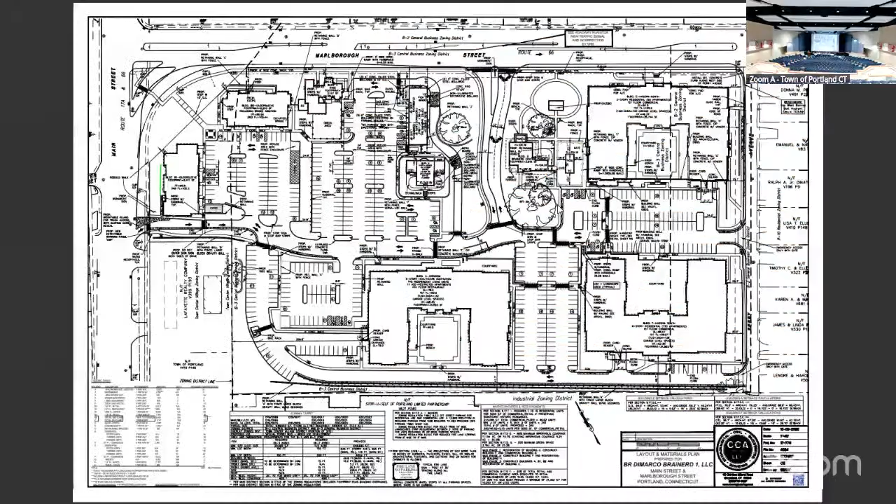If they could switch to slide 2. It's a good picture. Like something I'll draw. Oh, I think they went down too far. Oh, that might be it.

Yes, this is the landscape plan. We are proposing an enhanced tree-lined central pedestrian access, kind of at the midpoint of this curve of the new right turn to Marlborough Street. Prior, we had nothing proposed here before—we did have a connection out to Marlborough just off the corner of B2. But we felt this would be a nice feature to get into the complex through this central area. It is subject to the DOT landscape design team as far as the trees in the state right-of-way, but that's a process we'll go through with them.

The last change we're proposing: there is a sassafras tree located right here, and it's not in the best shape, not the best-looking tree in our opinion. In the prior approval, we had to bump out the sidewalk closer to Marlborough to get around the tree. We feel it's better to just eliminate that tree and go straight through with the sidewalk—it pulls it away from Marlborough Street a little further. We'll propose a new sassafras further off of Marlborough Street, between building C and B2, right in this area.

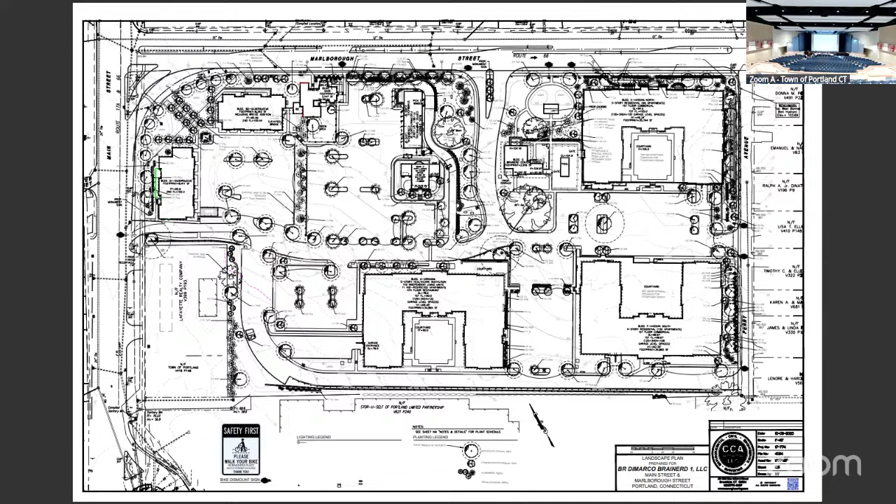My name is Maura Newell-Wan. I'm principal architect with Seventy2 Architects in Danbury. I'm excited to share with you some modifications tonight.

The modifications to the locations of buildings A and B offer an improved view shed to the Hart Jarvis house from Main Street. The red triangle shows the original view through the originally proposed buildings, and our new buildings are further apart, so the blue shows the wider view. We could see a lot more of Hart Jarvis, and also Sage and Brainerd House. The subtle design changes open up the interior of campus for better visibility to the fully restored Brainerd House and Sage House as well. The three historically restored buildings will be featured like the jewels that they are.

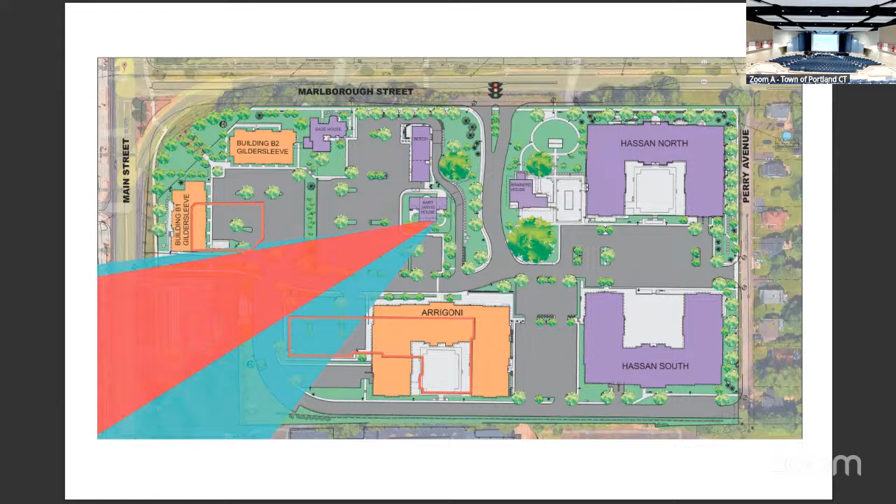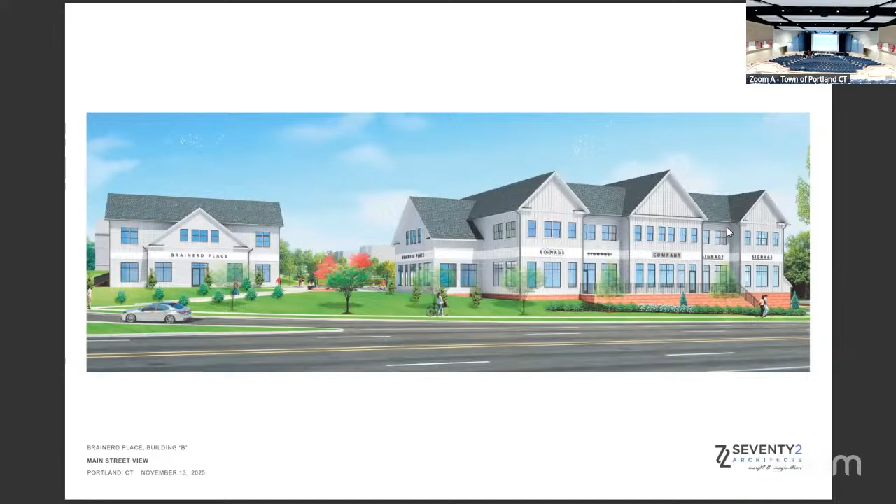Coming off the bridge onto Main Street is an important threshold welcoming visitors and residents to the town of Portland. These corner buildings are an opportunity to frame the entrance to town. Driving off the bridge now, the first buildings we see are flat roof commercial buildings, including a storage facility and a gas station. This development is an opportunity to revive more of a charming New England village feel.

The original building B will now be divided into two separate buildings. The proposed design meets and exceeds the recommendations of the Portland Village District Design Guidelines. The two buildings are similar but not identical to each other. By separating into two buildings, there's an opportunity to create a pedestrian and visual connection to the Main and Marlborough intersection. Slide.

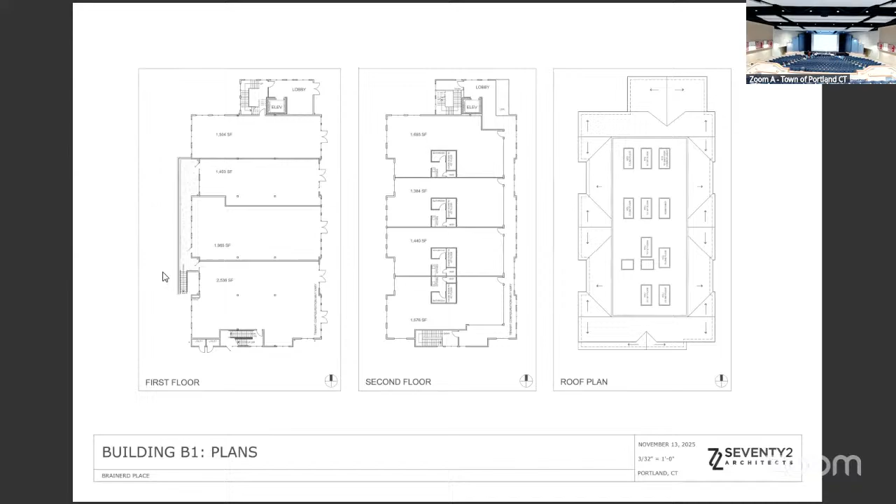The building features an elevator for handicap accessibility and two fire stairs for egress. Slide.

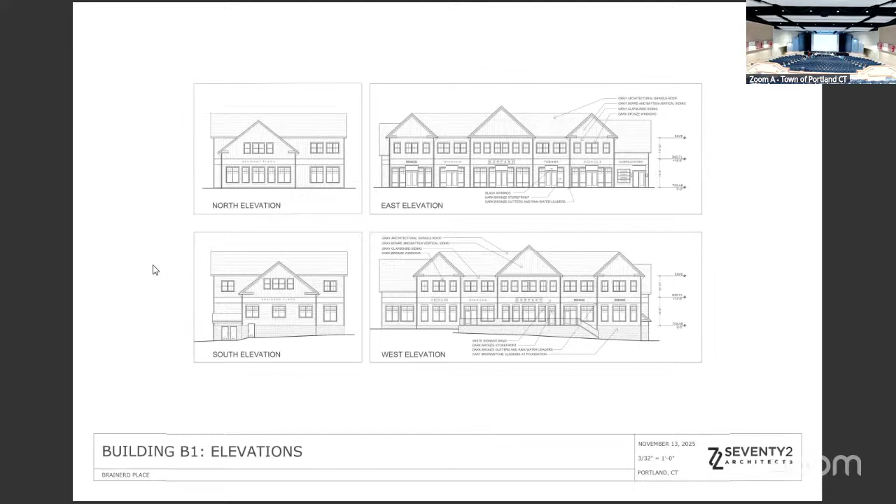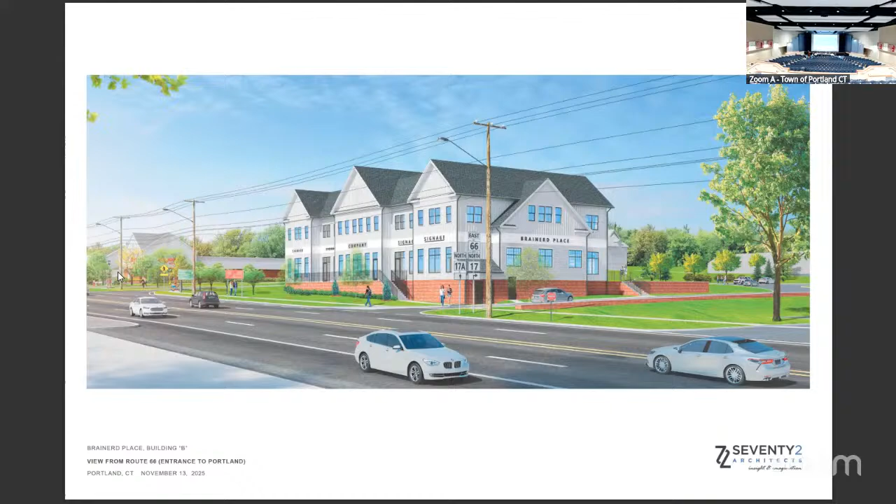Building B1 marks the entrance to Brainerd Place from Main Street. The architecture recalls a New England vernacular. Intersecting gables of varied height and width run parallel and perpendicular to the street. A mix of cladding textures include clapboard and vertical board and batten siding. Dark bronze double-hung windows are complemented by dark bronze gutters and rainwater leaders. The brownstone look foundation details match other buildings in town, including the Brainerd House and the Hart Jarvis House. Slide.

Building B2 is located at the north side of the site, adjacent to the historic Sage House. The existing grade slopes, and this difference leaves the building's one-story offset. The Sage House is shown here, grayed out on the left for reference. Slide.

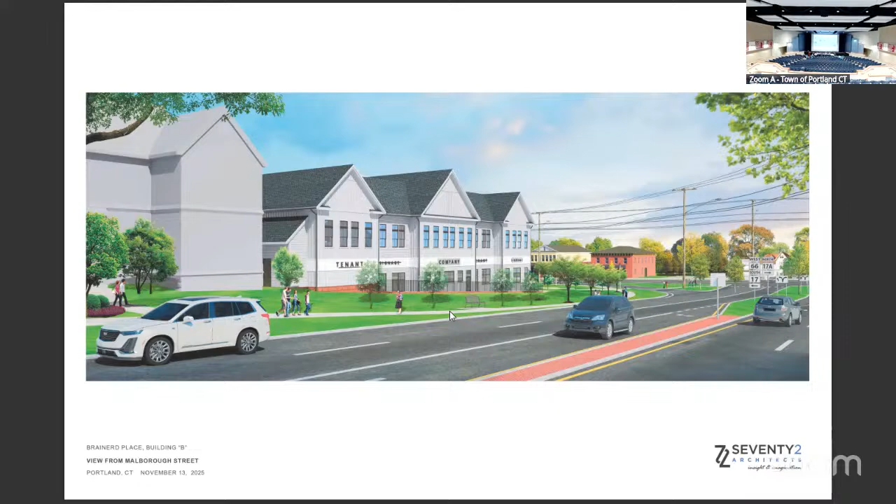The proposed design shows the second floor of B2 connecting to the first floor of Sage. So the way that Sage sits up a full story higher allows us to enter through the first floor of Sage, come across a bridge to the second floor of B2, all at the same level. The roof of B2 is approximately aligned with the second floor of Sage, and the first floor of B2 is about aligned with the basement of Sage House. The entrance to B2 through the historic Sage House offers handicap access, safe egress path, and a unique opportunity to celebrate and engage with this charming building, as the Sage House becomes the front door to the second floor of B2. Slide.

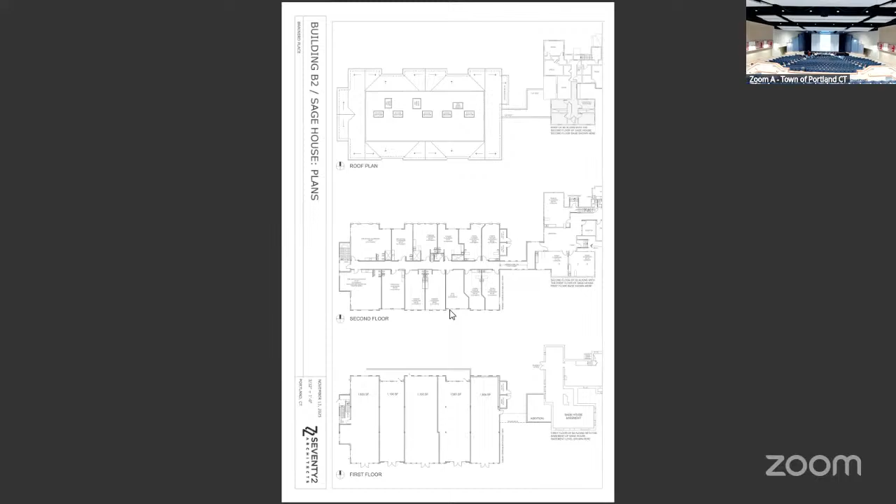Building A is home to independent living and active adult apartments, as well as a commercial restaurant that will be open to the public. This space is carved out of the 4th floor along the west side of this new building. Slide.

A large interior dining room hosts 115 guests, and an outdoor patio hosts 70 people. This uniquely situated restaurant will be a destination for tourists and out-of-town diners. Slide.

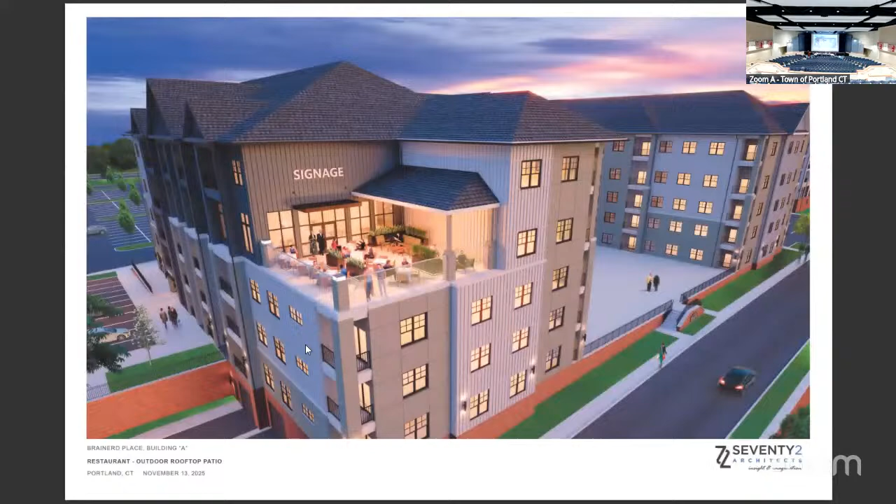Views from the rooftop terrace at the new restaurant are truly spectacular. Guests look up and down the river to the bridge and across the water to the rolling hills. This is a unique and special place that will serve not only local foodies, but also pull folks in from around the wider area as they come to visit this spectacular architectural experience.

The parking garage will be mostly underground and will include restaurant storage shown here in purple.

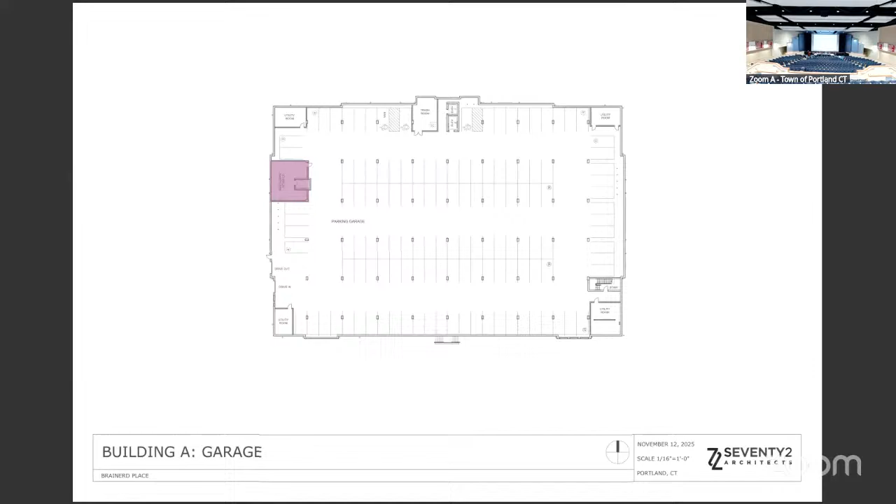The first floor hosts amenities for the independent living tenants, a wellness center, living room, theater, dining room, and other support services shown here in yellow. The restaurant entrance is shown in purple. Folks enter this lobby and take the elevator up. There are 23 independent living apartments shown in white.

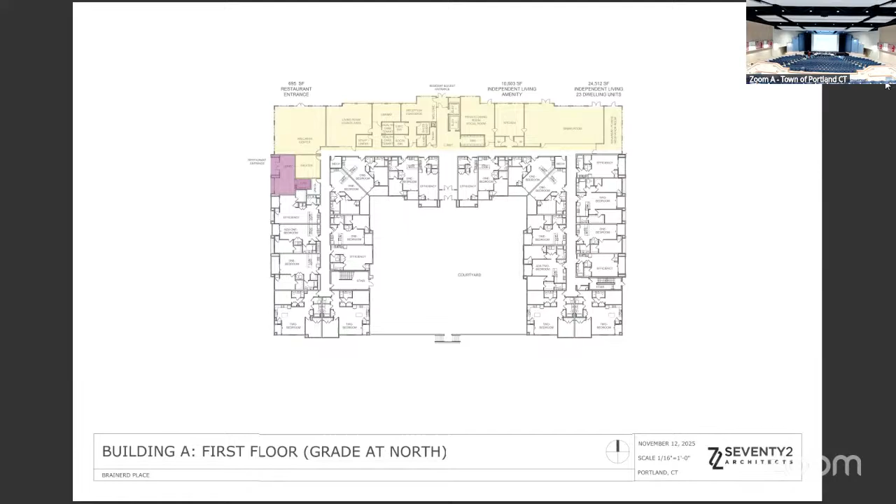The second and third floors each feature 35 independent living apartments.

The fourth floor has been reconfigured to offer the best west and south views. The restaurant is shown in purple. This arrangement also offers visual and acoustic privacy to the apartments as the restaurant is now moved off of the courtyard. 30 independent living apartments are shown here in white.

A new fifth floor will be home to 20 independent living apartments shown in white and 11 active adult apartments shown in orange.

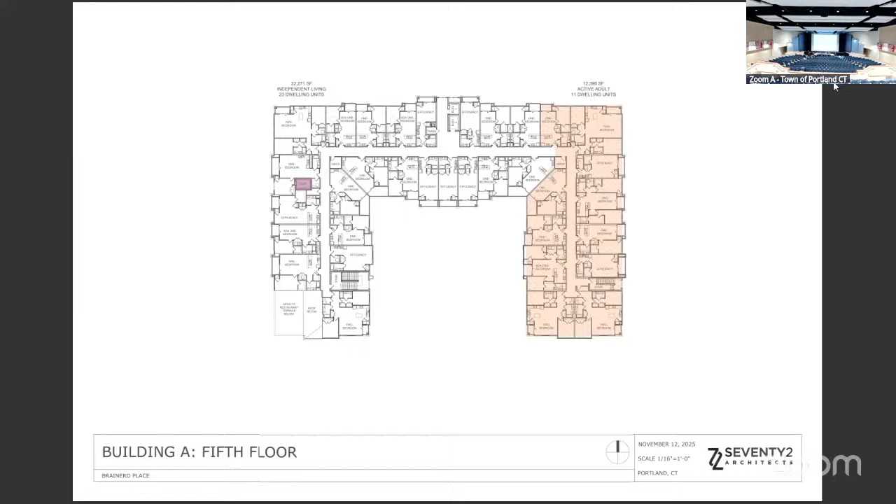The building will be fully sprinklered and handicap accessible. Exterior walls will be fire protected, fire retardant treated wood for additional safety.

3 elevators and 2 oversized fire stairs will serve building occupants and offer safe egress from the building.

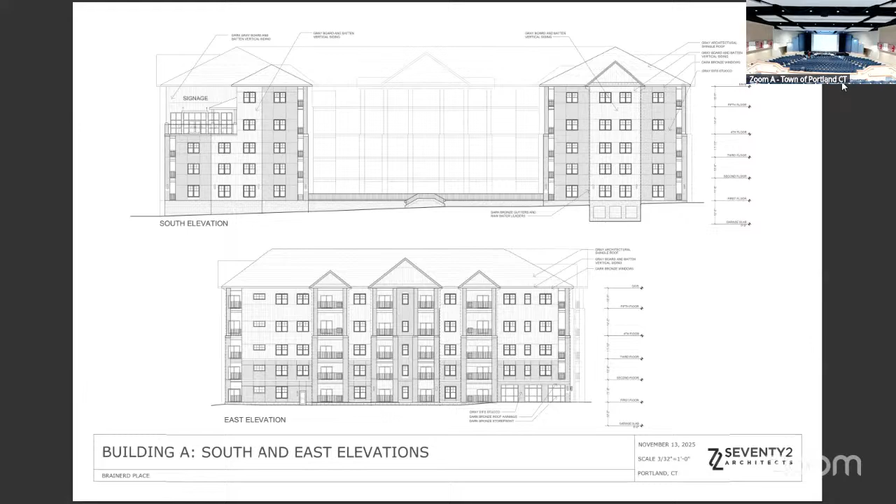Thank you for listening to me talk about architecture for so many words, and we're proud of this design and excited to share it with you today.

That pretty much does conclude our presentation. I'm glad we stopped on this slide because I do think this is a fundamental improvement, walking into the corner of the site in a way that we couldn't do before. And it wasn't even our idea. It was a prospective tenant who came up with the idea of entering a daycare into the Sage House and then connecting it to the top of B2. And then we didn't need the shared elevator because we were getting to that second floor. So it evolved organically, but I think this is going to be a really nice corner now.

So that does conclude our presentation, and we'll certainly answer any questions.

Okay, we'll now entertain questions from commission members. I've got several. Okay, you want to go first? Doesn't matter. Sure, go ahead.

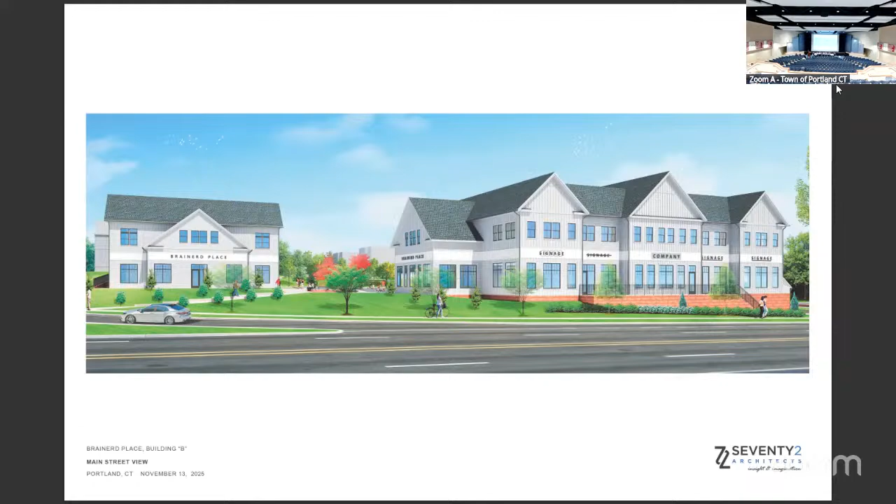And so when I looked at the sidewalk being pushed out closer to Marlboro, and when you walk along there and the cars are ripping through, it just felt like we weren't getting the best experience leaving that tree there, because it wasn't on the same level as the others we were protecting on the other parts of the job. So that was basically why we, as a design team, said, well, what could we do to honor the sassafras tree that's there, and straighten out the sidewalk so it feels safer walking up and down Marlboro. That's kind of how we got to this.

We could ask someone for a diagnosis. It just is relative to the others that we saved - I thought it was a very, very lesser tree, I guess.

How big of a tree are you willing to replace it with? Yeah, I don't know, we could haggle over that - pretty big, we can't bring in... I get where you're going with that, and I do think some decent caliper size is appropriate. But I'd have to talk and cost that out and such.

We can do that between meetings and give us some feedback about what we would propose along those lines, because I do think one of the good things about this job and others like it is when there's mature plantings. So we could investigate that. You put a lot of effort into the other trees you've retained on the site, but you haven't put the same effort into that one.